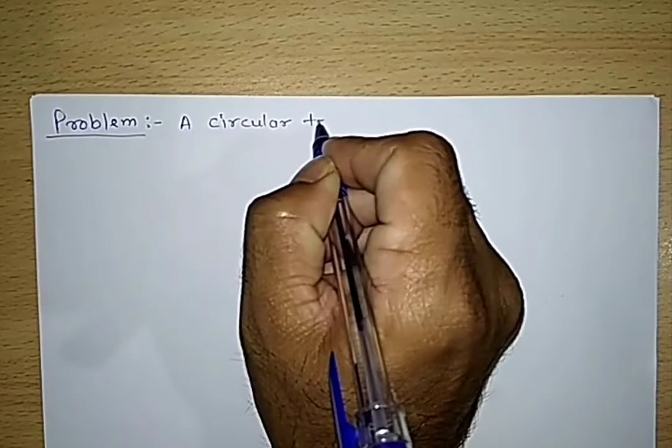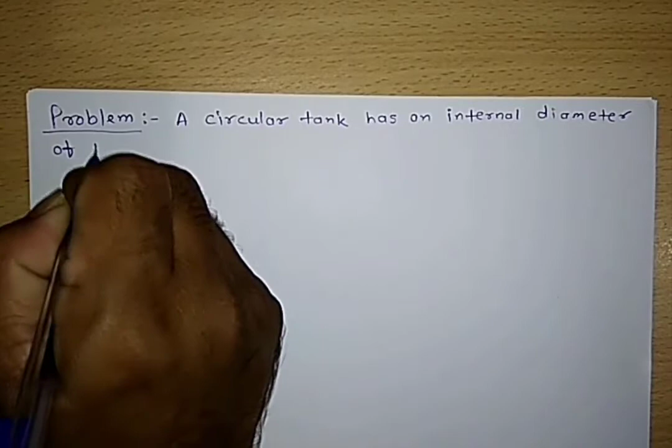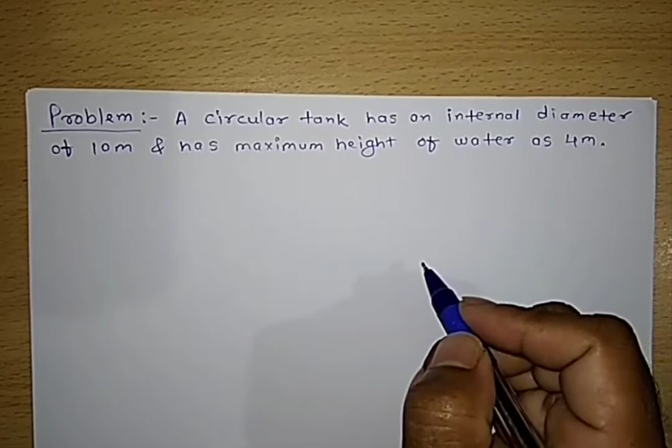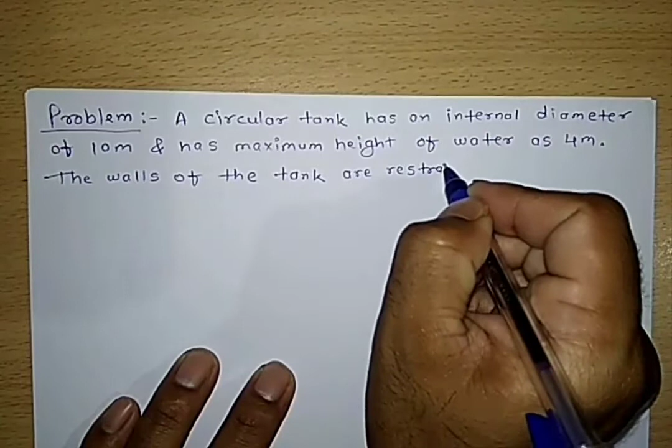We will first write down the problem. A circular tank has an internal diameter of 10 meters and a maximum height of water as 4 meters. The walls of the tank are restrained at the base. Design the tank.

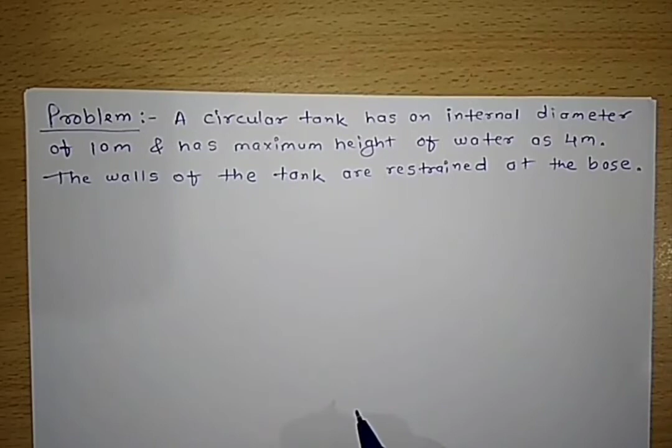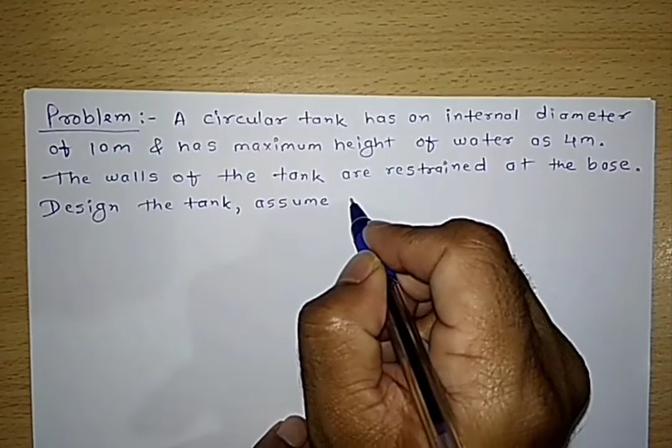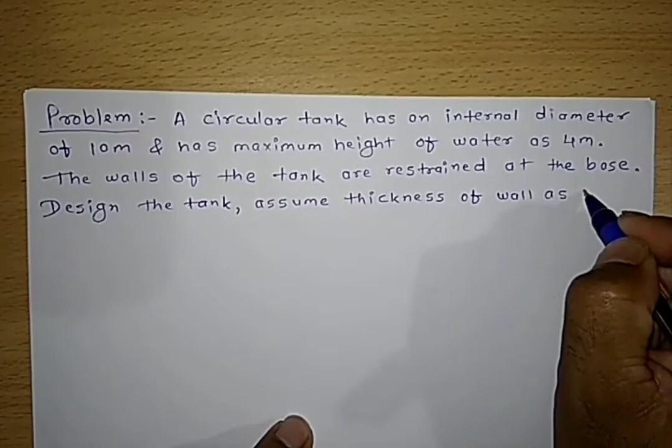Assume thickness of wall as 160 mm.

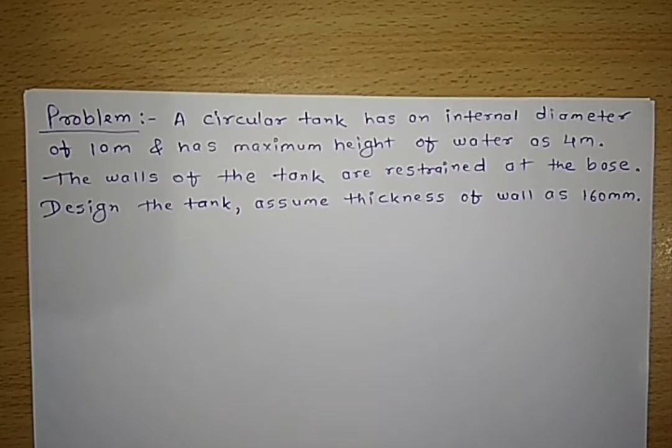So this is a problem where a circular tank is to be designed. It has an internal diameter of 10 meters and maximum height given as 4 meters. The walls of the tank are restrained at the base, so this means it is a rigid base water tank. You need to design the tank and assume the thickness of wall as 160 mm.

So we'll solve the problem, and this problem consists of different steps. Step number 1 is the calculation of hoop tension and its position. Then calculation of moment at the base, and then we will calculate the shear at the base, and then we will design the section for cantilever action.

We will also calculate development length, and then we will design the section for hoop action as well. Then we will go for the distribution reinforcement, and then we will provide the haunches, and lastly we will provide the design of base slab, and based on this design we will draw the reinforcement details.

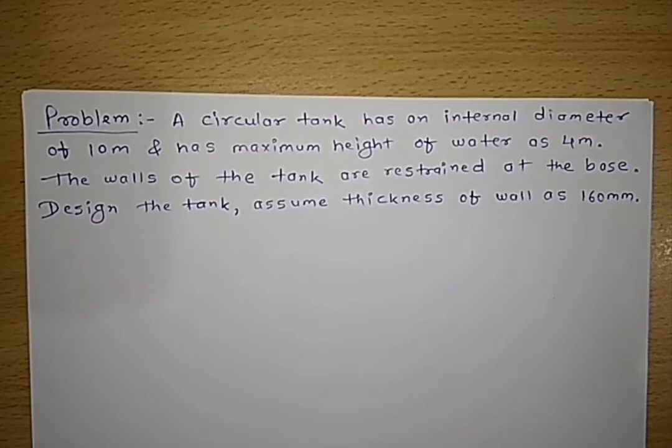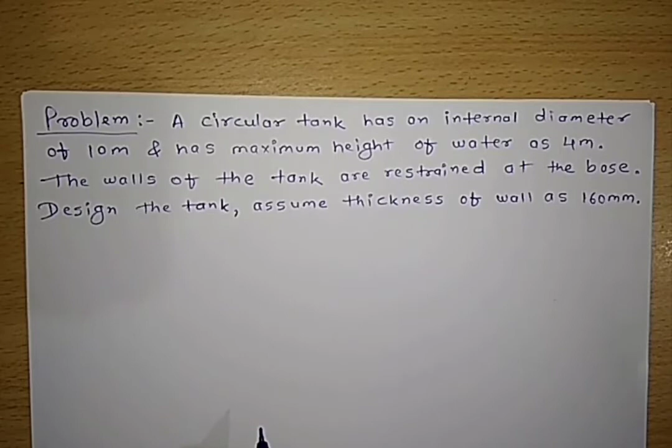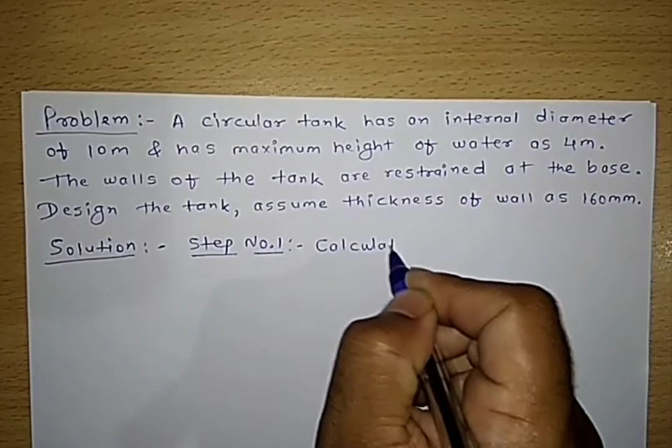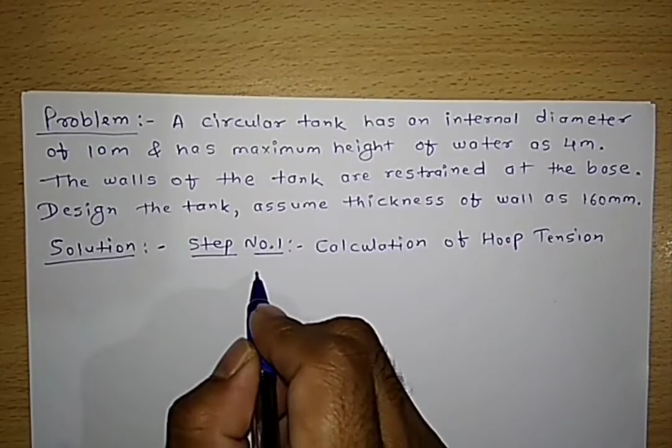So we'll go step by step. First of all, step number 1, that is calculation of hoop tension and its position.

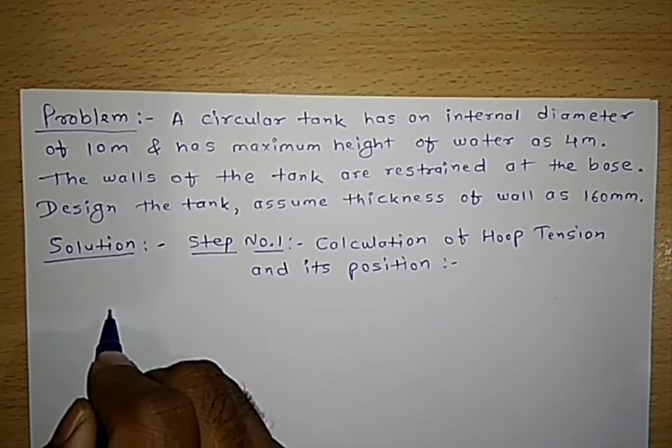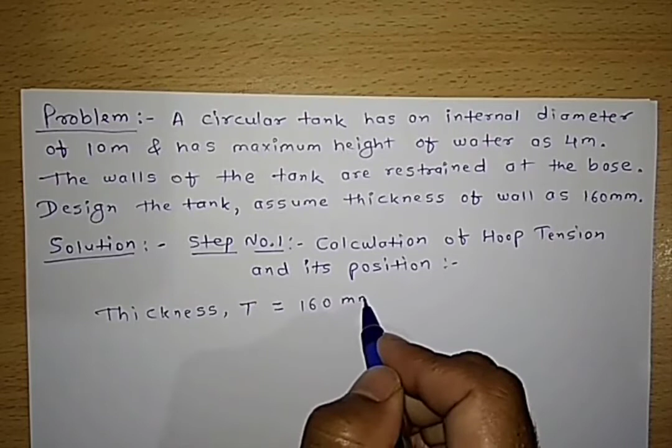Now thickness is already given to us, denoted by T, that is equal to 160 mm, and if we convert it in terms of meter, that is 0.16 meter.

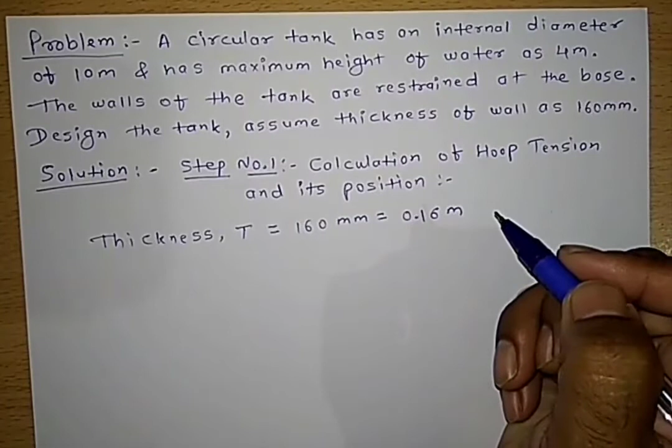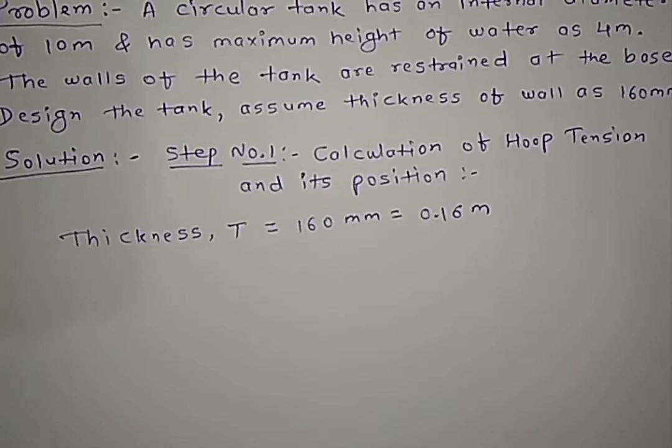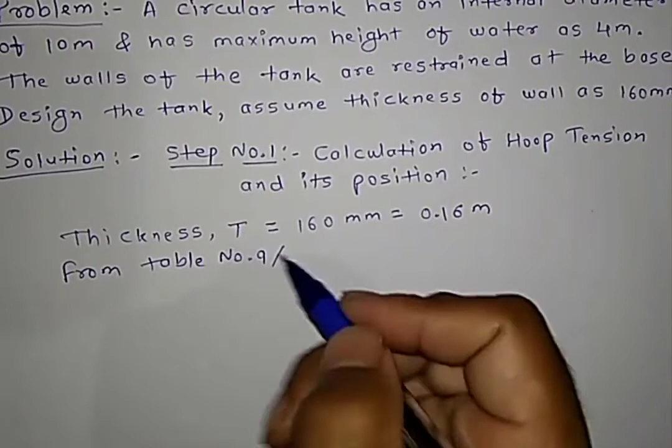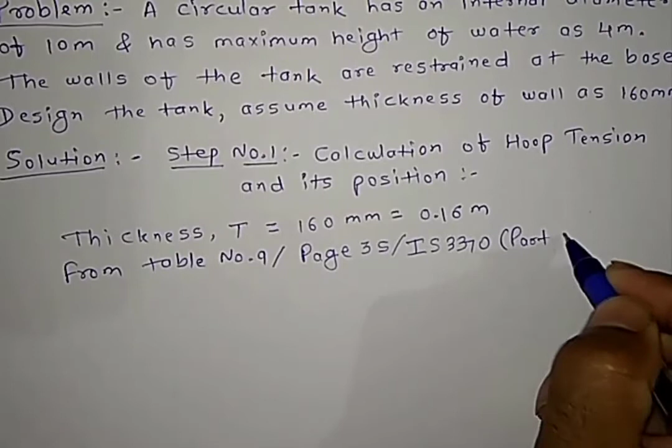Now we have to go through table number 9. I'll write down from table number 9 of page 35 of IS 3370 part 4 of 1967.

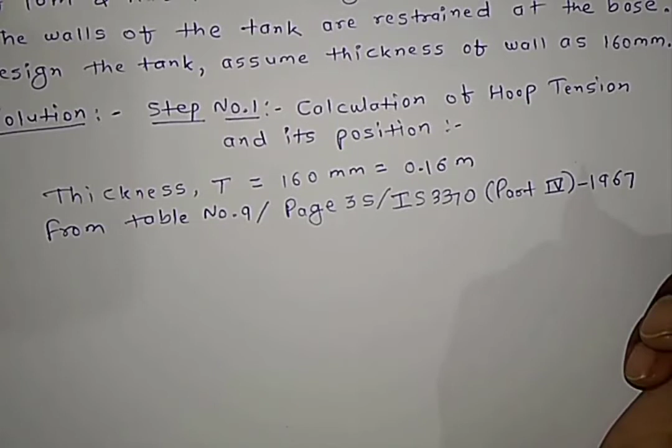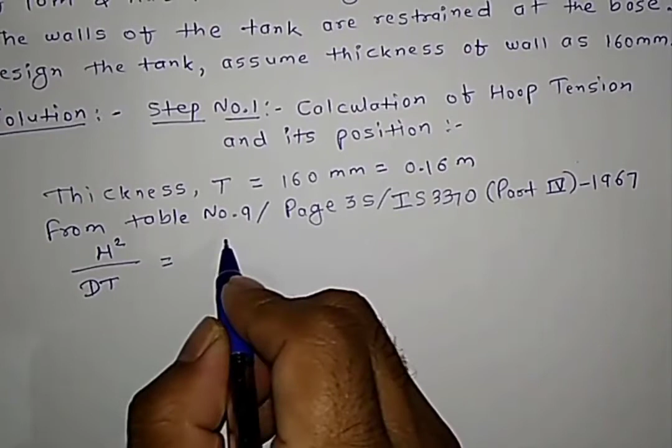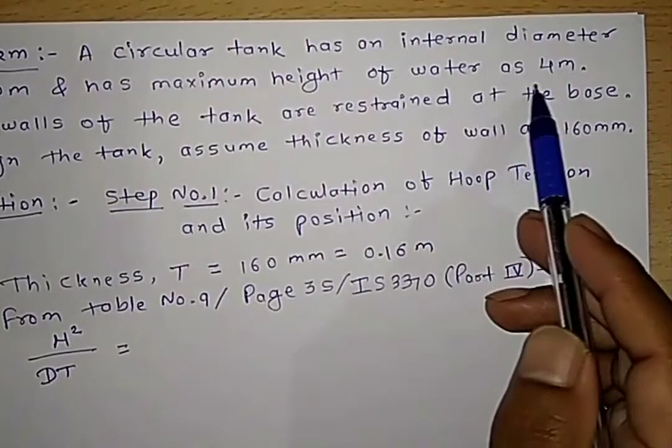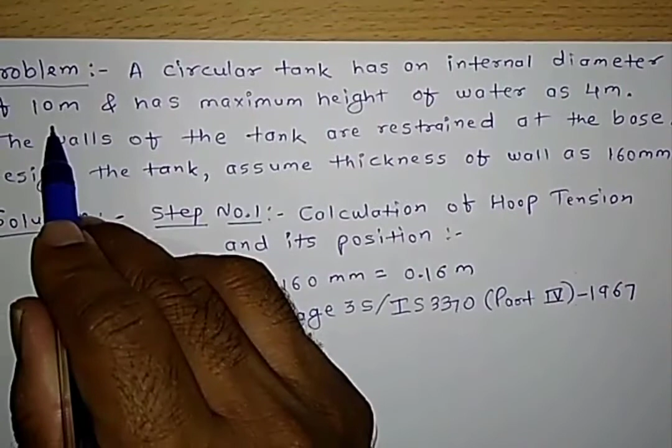If you go through this page number 35, table number 9, you will get a coefficient based on h square by dt ratio. So we need to first calculate h square by dt. Height is given as height of water tank as 4 meters, and diameter is given, that is internal diameter, and this is 10 meters. So we write down 10 multiplied by 0.16, it is the thickness.

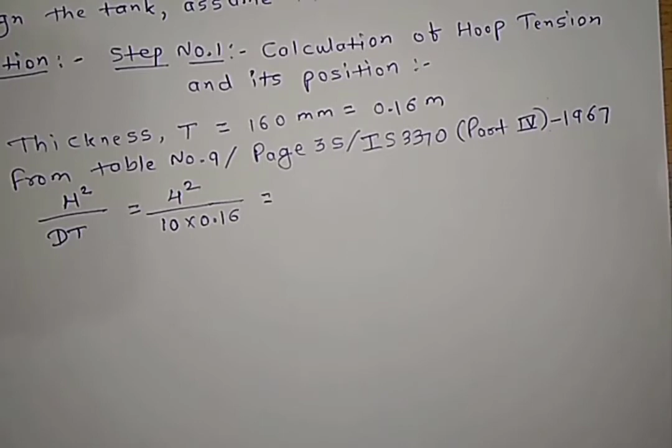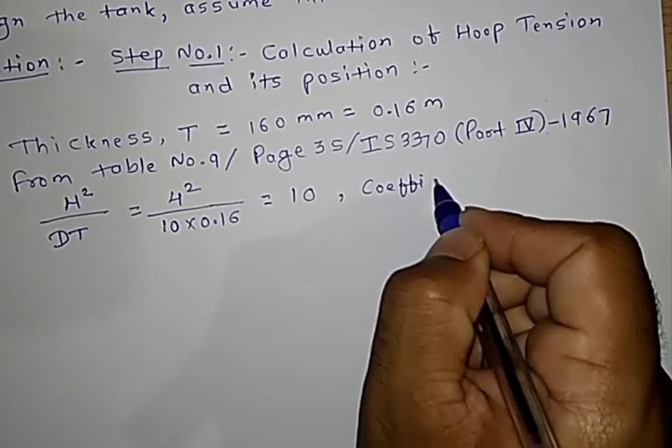Now you need to calculate this h square by dt ratio, and depending upon that we will take the coefficient from table number 9. This is coming out to be 10, and from the table we got the coefficient, and that is equal to 0.608.

Now if we look at the same page, the formula is given for the maximum tension, and that maximum tension is equal to coefficient multiplied by WH into D by 2. From here you will get the maximum tension.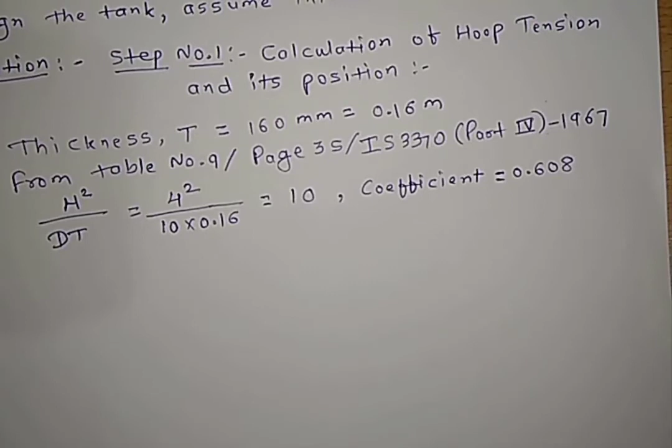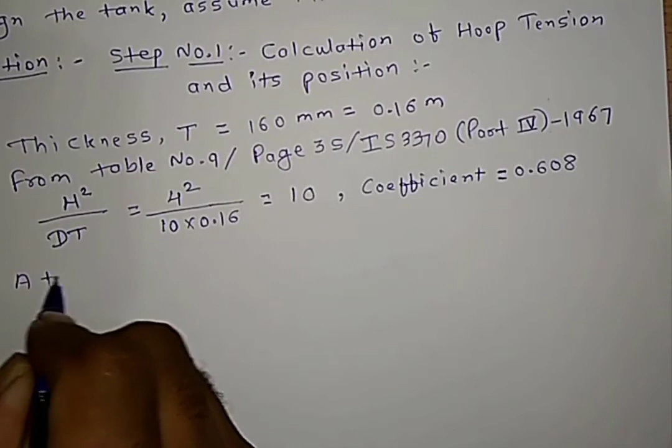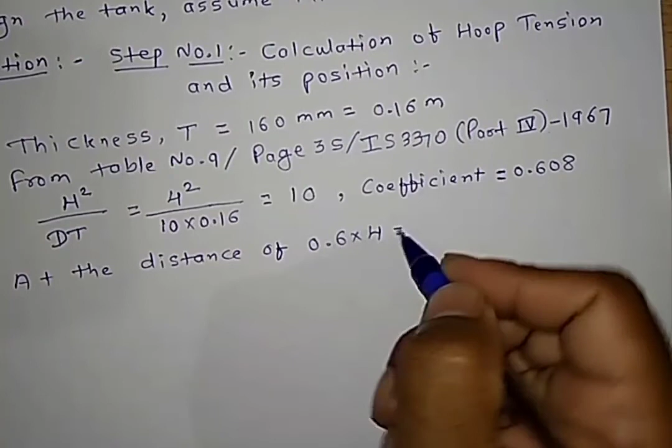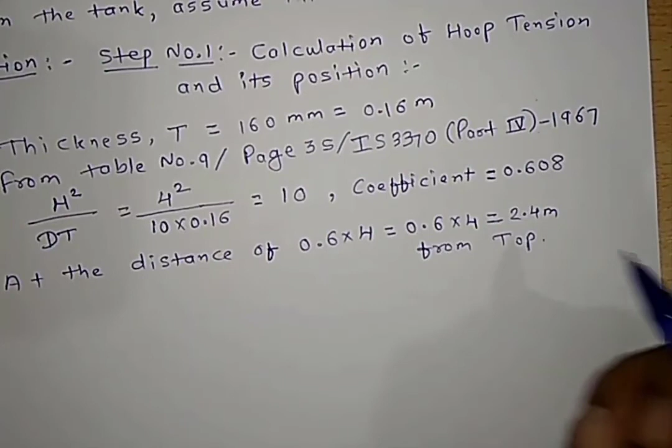And this maximum tension is going to occur at 0.6 H. If you calculate from 0.6 H, so 0.6 H will be coming out to be, at the distance of 0.6 multiplied by 4 meters, that is coming out to be 2.4 meters, and this is from the top position. So this is what we got as the maximum coefficient depending upon the h square by dt ratio.